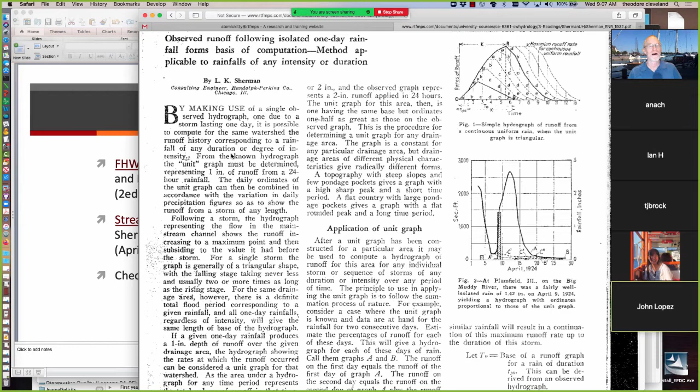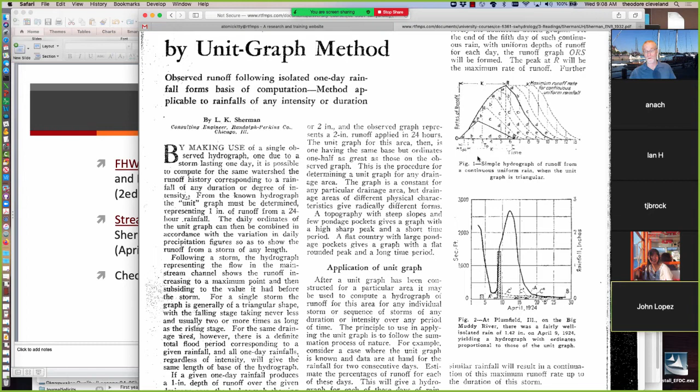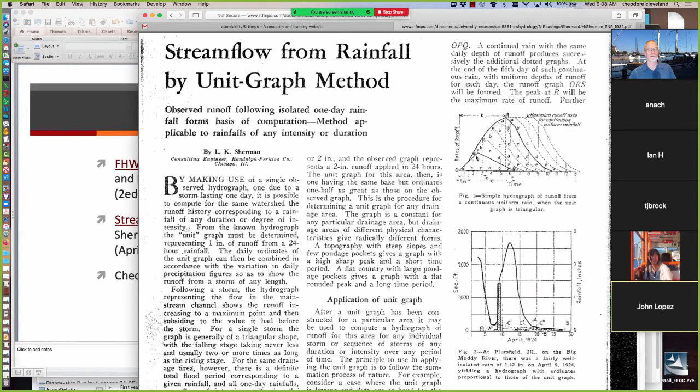So Sherman was a consulting engineer in Chicago, and the method that he demonstrated was largely graphical. Now that was a consequence of the computational tools at the time. Digital computers as we know them didn't exist yet in the 30s. There were analog computers and there were mechanical computers, but those actually required a very skilled machinist to just construct the computer. Think of it as actually writing the program, but you're writing the program by cutting pieces of metal to different lengths and hooking them up into gears.

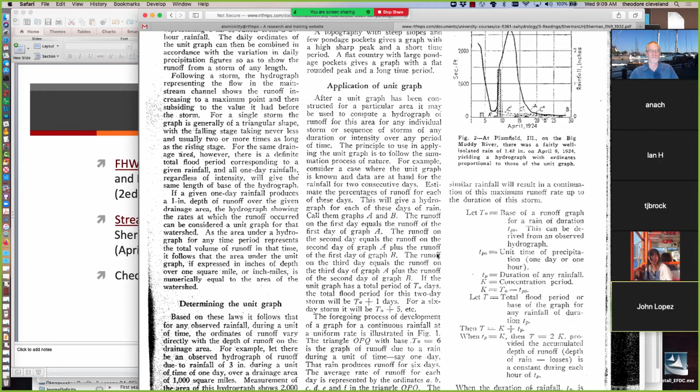If you ever get to visit Berlin, there's a museum of industrial technology, and they have on display a circa 1930s era mechanical computer. It still uses binary encoding, but it's easily the size of a small car and has computational capabilities rivaling that of your watch. I mean, in today's context, it's a fascinating thing. So you should all get to take a look at it. I have some photographs of it somewhere. I'll try to work it into a lesson someday just for some interesting sideline. And so you can read this on your own.

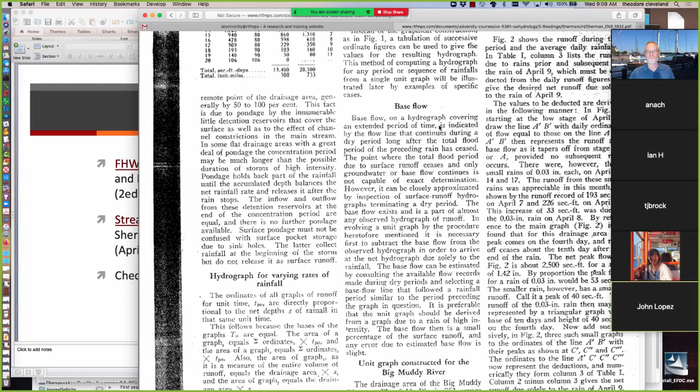Some of the key features of Sherman's paper is the idea of duration and concentration, or what later I call a characteristic time. And he's got some examples. He discusses baseflow, has one for a particular river, and shows the computed and observed hydrograph.

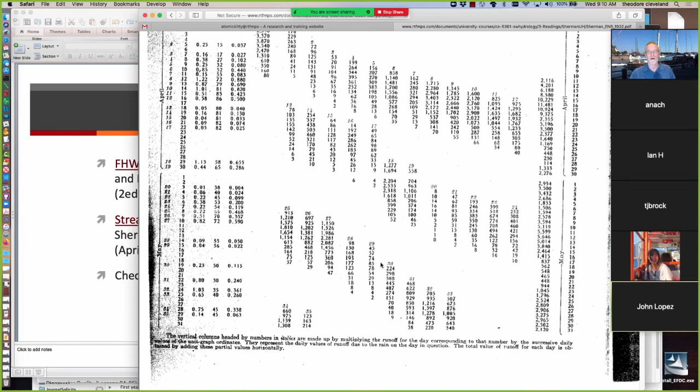Now in the 1930s, it's very unlikely they made continuous stage measurements. So this is still a cubic spline drawn through discrete points. But if you look at the plot, that's not too bad. Actually, we can't do much better today. And then here are the data that he used. And then here's another river that he studied, and actually get very good performance there.

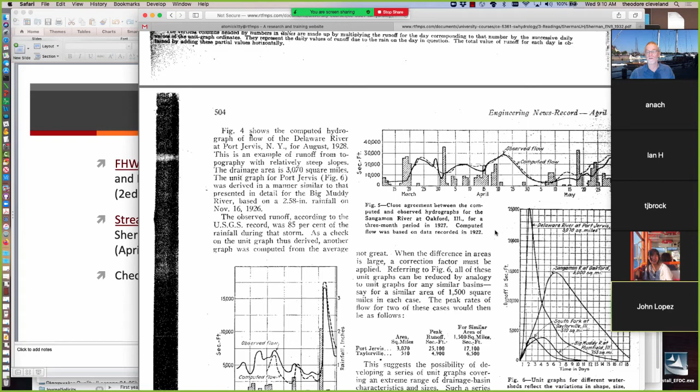And then there's a discussion on the different shapes of unit hydrographs that are proportional to topography, storage in different locations. This too was a very important concept because up until the paper, developing a response function for a particular river basin wasn't all that hard. And in fact, that clearly would have predated Sherman's paper. But making the observation that the physical characteristics of the watershed itself changed the shape of the response function.

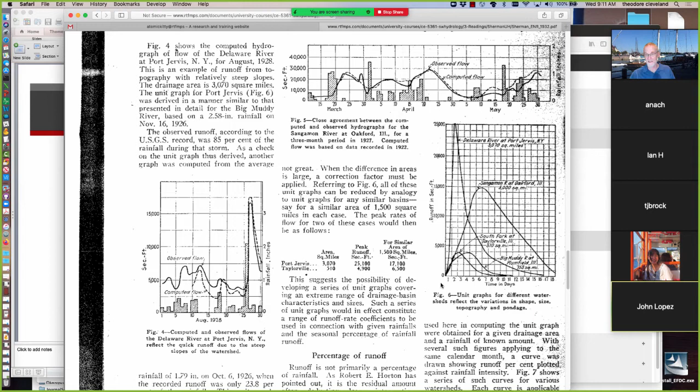And at the time, not in a predictable way, but there was clearly a message here that if we could correlate shape, size, topography, storage, and what other metrics we could find on the watershed, there was a chance that we could predict these response functions ahead of time and not necessarily have to have observations. And to this day, that's now done. Functions like these, if they are inferred entirely from watershed characteristics, are called synthetic hydrographs, meaning synthesized from things like watershed areas, slopes, what have you.

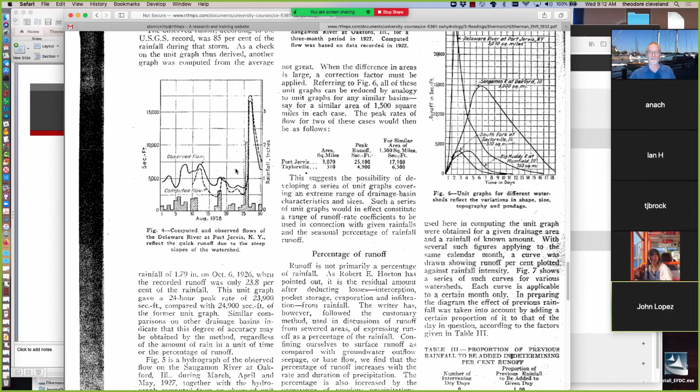Construction of responses based on observational results, a data science approach, that's called unit hydrograph analysis. So when you see the words analysis and synthesis, synthesis doesn't mean they're making it up out of the blue. Actually, they kind of are. But they're relating correlations of observed behavior to observed measures of a watershed. So this was actually a very important historical development in hydrology, certainly in engineering hydrology, but hydrology in general.

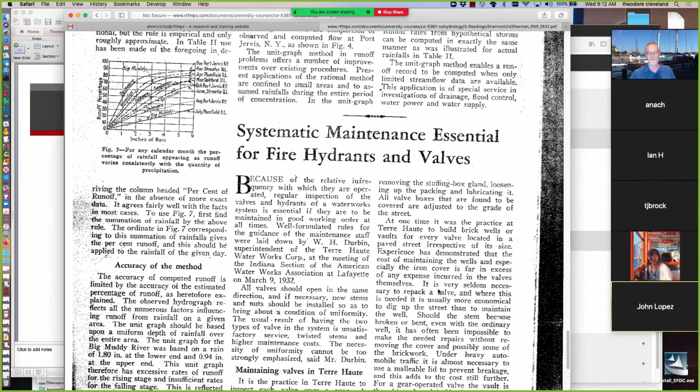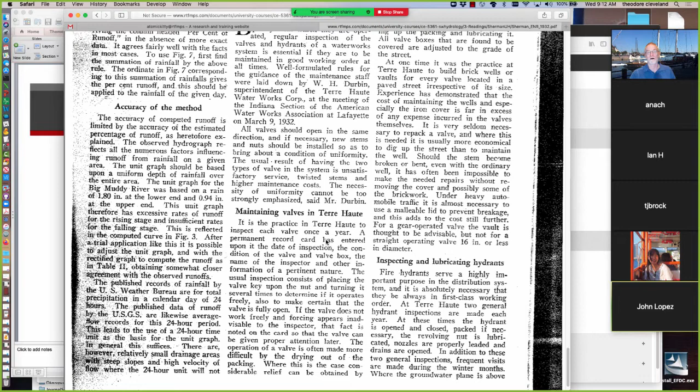And we get to the end of this paper, and so here's what I was pointing out, the difference in 1930s era articles and today. They just started the next paper on the same page. So that's not as common anymore. So Sherman's is a good read from a historical perspective. I don't think you'll find it terribly easy to read in the context of, I'm going to read this and apply the method to someplace else. It was a different writing style back then, and I would imagine you'd find that hard. I certainly would.

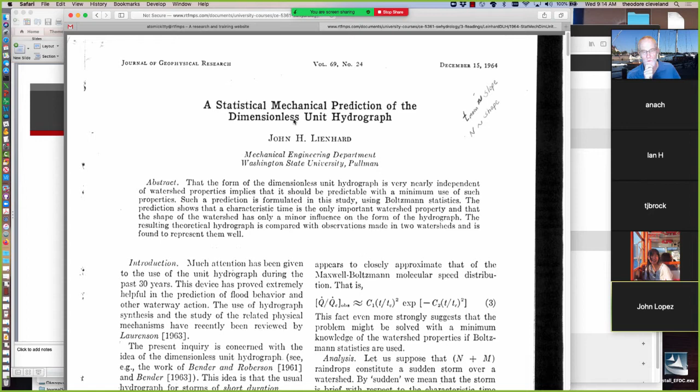Let me get the second paper that's an important historical read. It was a contribution by a mechanical engineer. Actually, his area of research was thermodynamics. And this paper is important because it establishes the idea that there is a valid thermodynamics or statistical mechanical explanation for the unit hydrograph, which in turn was promising in leading researchers to believe that we could correlate physical properties of a watershed to the hydrograph distribution. Now this was likely a difficult read because it's assumed that the audience has a reasonable understanding of Boltzmann statistics and statistical mechanics.

But going through it quickly, the discharge ratios, so Q dot sub C is a characteristic value. In our case, it's either a time characteristic, same thing here. It's also a magnitude characteristic, which would be our total storm depth, if you will.

And he's saying that the ratio in time to a peak characteristic value is some function. And further it goes on to postulate that function is going to approximate a Maxwell-Boltzmann distribution, which is shown here.

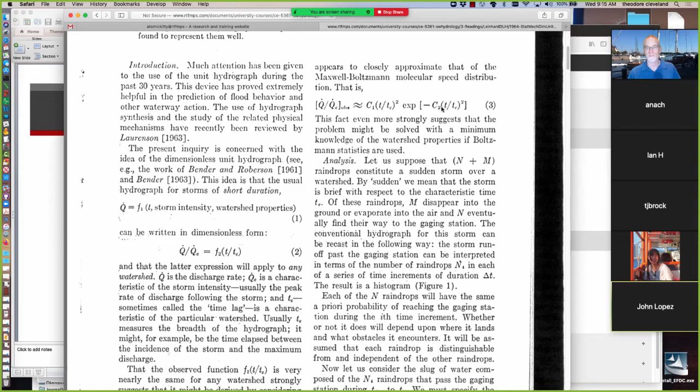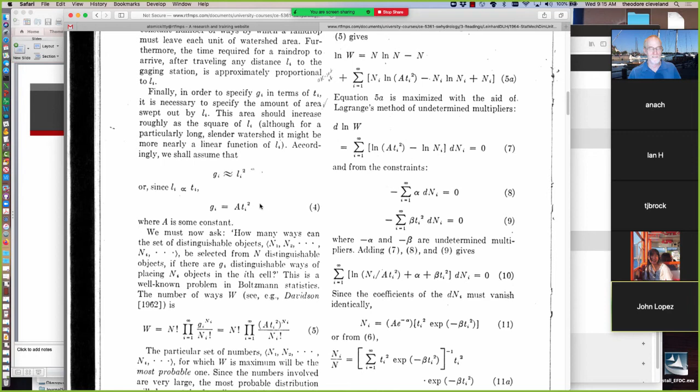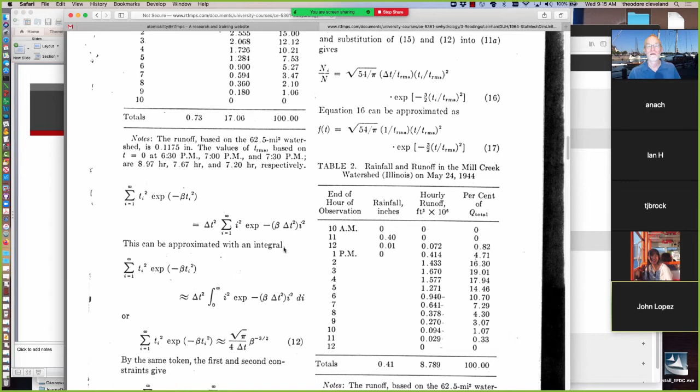And then from that, a series of statistical analysis, actually probability analysis, of what a Boltzmann distribution should look like leads to ultimately try to get to the end here. This is pretty close. A hydrograph distribution. And this paper doesn't tell you how to find these characteristic times, but it does demonstrate that if you have them,

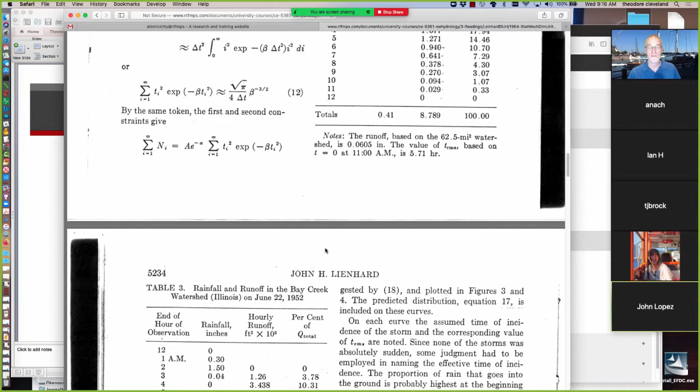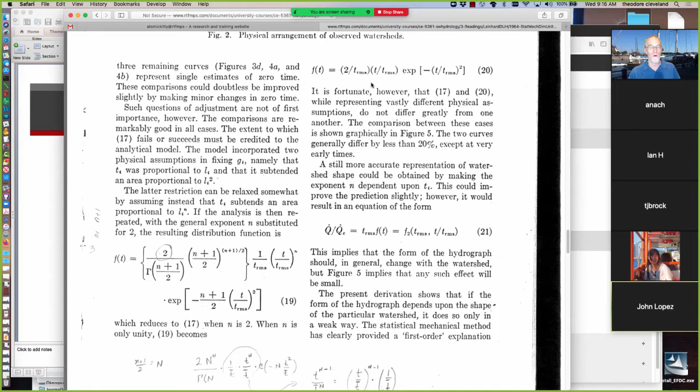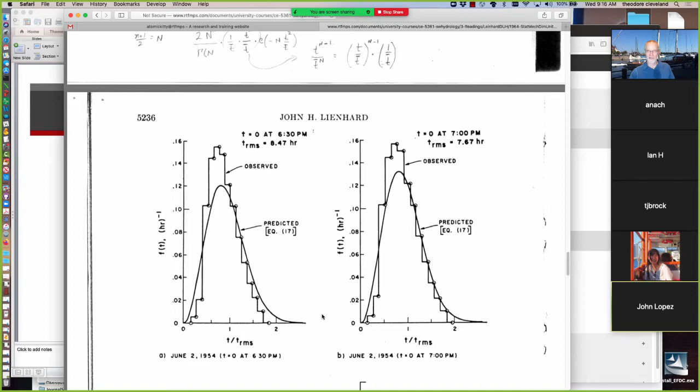there's the final hydrograph distribution, either in that form or this form, depending on the magnitude of an exponent. And you can see some stuff here that I wrote years ago, long time ago. But the results are shown here for a couple of watersheds, a couple of storms. And like Sherman's work, it's not bad.

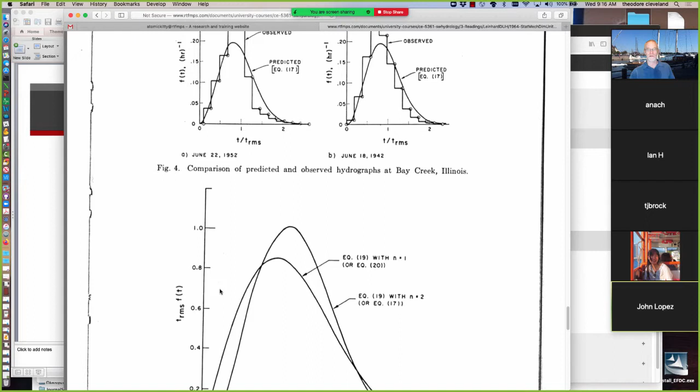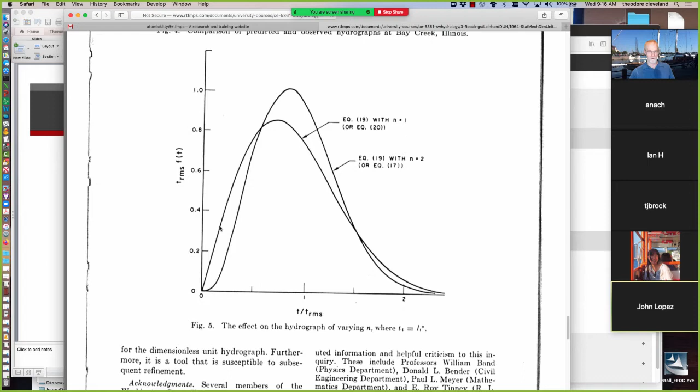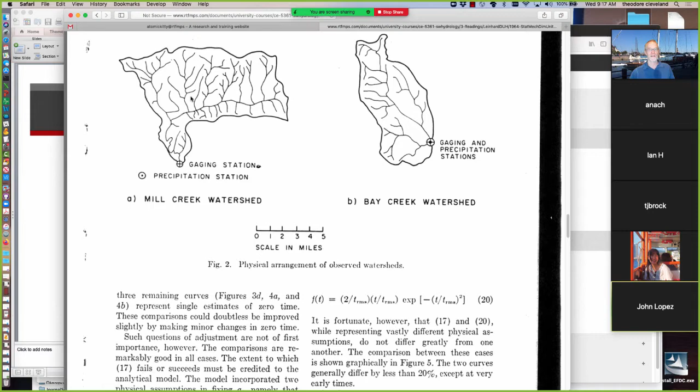And so these were the historical papers, and then the benefit of Lienhard's paper is by associating it with a statistical mechanical distribution, we're able to study the effects of different parameters of the distribution. And the key things here in his distribution is this exponent that he demonstrated would change depending on a fan-shaped watershed or a long, slender watershed.

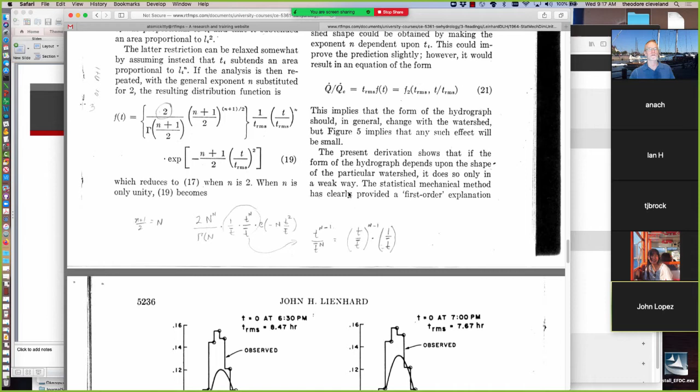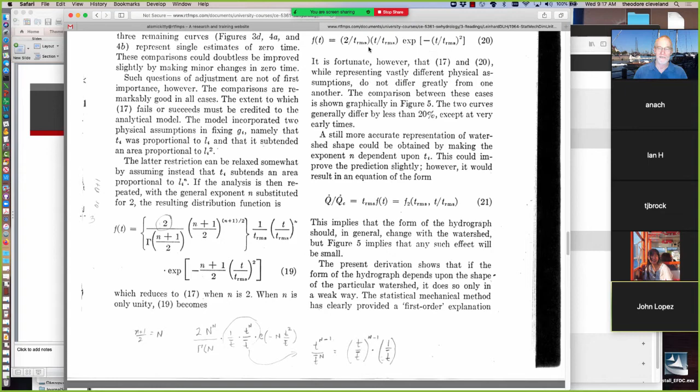And then there was subsequent work to try to quantify what that exponent should be under those different conditions. The other important feature was what characteristic time to use. So Lienhard used root mean square time, but one could just as well use an arithmetic mean time as the time characteristic. So that's some historical background.

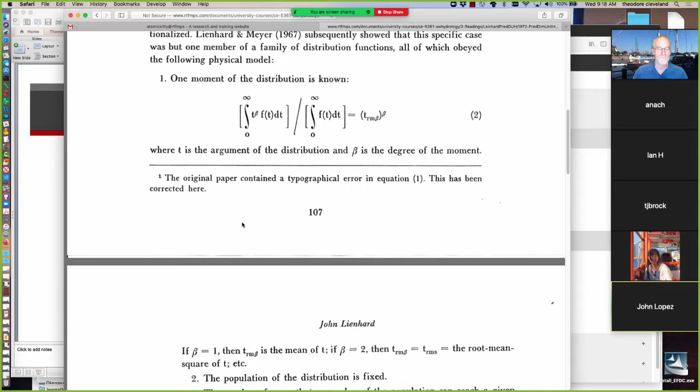And then in '72, Lienhard condensed the results. Hopefully this is the paper I want you all to have access to. Yes, okay. So here equations 3, 4, and 5 constitute what has become called the Lienhard hydrograph. And what's important is it turns out that they're a generalized gamma distribution, which is well documented and used in the literature. And here we see the effect of a fan-shaped watershed on the exponent here, and a long, slender watershed where the exponent becomes 1.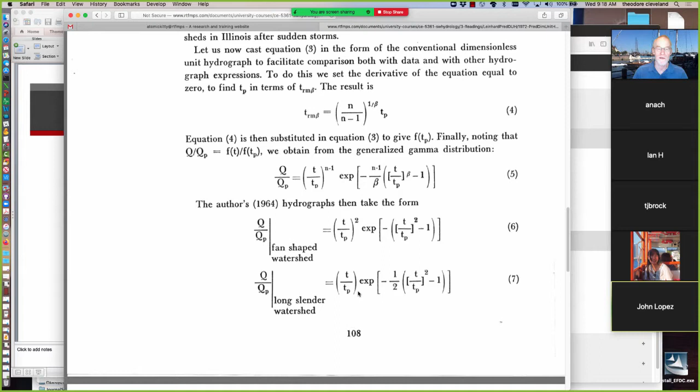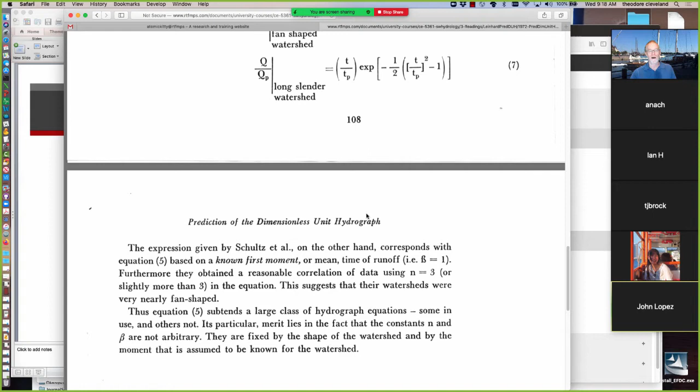And in some instances, the exponent goes greater than 2, although that's hard to come up with an understandable shape that causes that in the real world. So that's our theoretical background for the unit hydrograph. So it's not just a function of convenience. There is some meaning behind it.

So before we continue further, let's discuss the idealized hydrograph that you see probably in every hydrology textbook in the history of the world, and some that haven't even been written yet. So a hydrograph is a plot of paired time discharge values. And nowadays it may not be a plot, but it's a set of paired values. So there's a time and a discharge associated with that time, and we have a collection of those. Usually it's monotonically increasing in time, because otherwise it doesn't make any human sense.

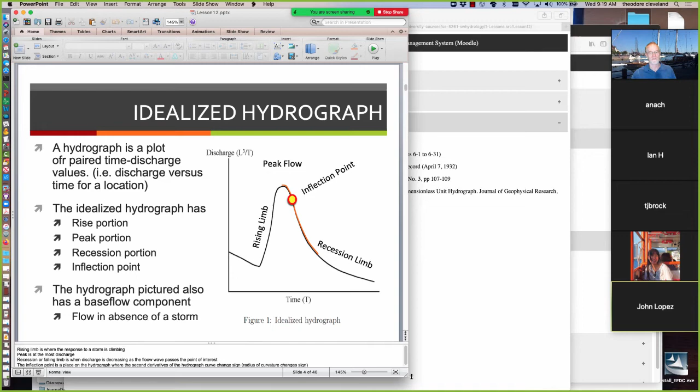And the idealized hydrograph depicted in here, go ahead and make it full screen, has a couple of portions. So there's this portion in time where the discharge is declining as time increases. So think of it at basin scales. The basin is slowly draining. That's water probably coming from groundwater. And then there's an input of water, a storm, if you will. And that input causes the hydrograph to start to rise.

So go ahead and put, so maybe there's some rain right there. And to make it meaningful, let's have some other rain right there. And I'm making no attempt to get the heights of the blocks to make any sense. But so we have this portion where there's some new input, and all of a sudden at the observation point, we see an increase in discharge.

And then it increases up, in the ideal case, to a peak flow point, and then it starts to come down, and the declining or the recession limb may or may not begin after the rain has ended, but most likely after the rainfall's ended it will start to recede, or at least if the rainfall rate has dropped considerably.

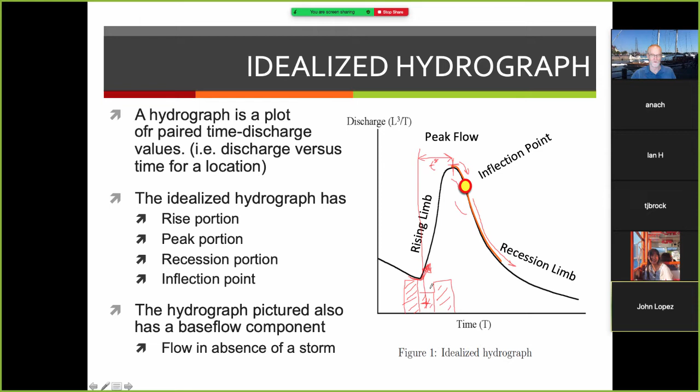So the idealized hydrograph has a rising portion, a peak, recession, and an inflection point. And in this particular hydrograph, it also has a base flow component because we're not starting at zero. We have some flow in the stream before the storm begins. So in many analyses, the first step is base flow separation. And there's quite a few different computational or operational approaches to making that separation.

The method displayed in this diagram is called the constant discharge method. And it takes its name from when the hydrograph begins to rise, we declare the discharge the moment it begins to rise as the base flow separation. And you can think of us as extending a line across this hydrograph. Everything on this side of the line is base flow. And everything above is storm flow. And so that's called the constant discharge method.

That method has some attractiveness for automated and semi-automated separation. And it is likely a relatively commonly employed method in practical application. A second method is called a constant slope method. And in this case, we're starting at the same beginning point, but instead we extend that line to the inflection point on the recession limb. And everything below it is base flow. Everything above,

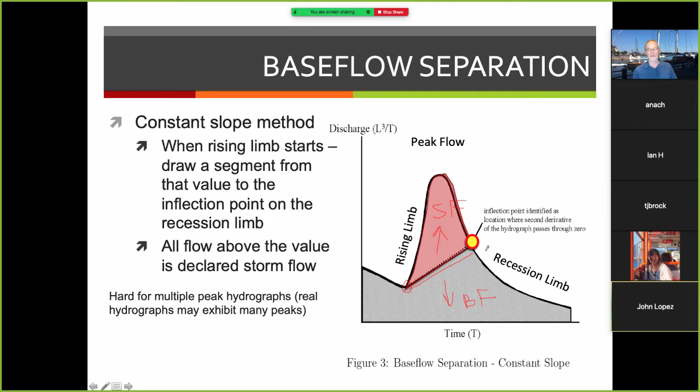A variation of it that's even more elaborate is called the concave method. And here again, starting from the same beginning point, when the flow begins to rise, we extend a tangent line to the pre-storm flow down to a point beneath the peak, and then another line segment from that point back up to the inflection point. And this shares the same difficulties as the prior method, in that with real storm data where there's a lot of variability or multiple peaks, this may be quite impossible to accomplish.

Nevertheless, this is used in idealized studies, and not all real data are as multi-peaked and ugly as I showed you all for Ash Creek. Every now and then, when we're doing a unit study and we're actually collecting data with the intention of understanding the hydrologic response of a particular gauging station, if you will, every now and then we get storm and discharge flows that are as clean as this diagram. And so those are immensely valuable from a scientific and engineering analysis perspective. But not always, and we can't predict when that's going to happen ahead of time.

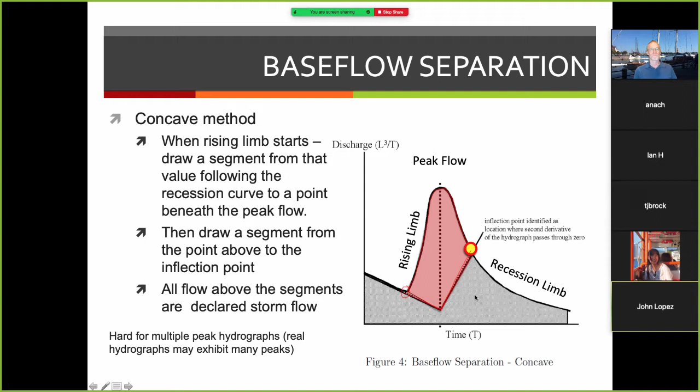So there's several more ways to accomplish base flow separation. Probably a more elaborate method that's in some of your older hydrology books is called the master depletion curve. And this is a basin scale approach. So this requires multiple years of data, and the analysts have to select particular storms from that multiple years of data. And they're lined up in a time agnostic order. And from that you can determine how the basin drains in the absence of storm flow.

And usually it's a decaying exponential, and there's a factor in the exponent. So usually it's like Q0 e to the minus kt, something like that. That constant k is what's sought from this analysis. And then from that point forward, from any known flow in the basin, especially if you know it's not storm flow, you can use that to determine what the base flow would be several months into the future, and then apply that to your storm hydrographs to do base flow separation. It's actually a far more elaborate problem than you could possibly imagine from anything in writing. Another approach is continuous simulation techniques, which I would qualify as being very much a master depletion curve method.

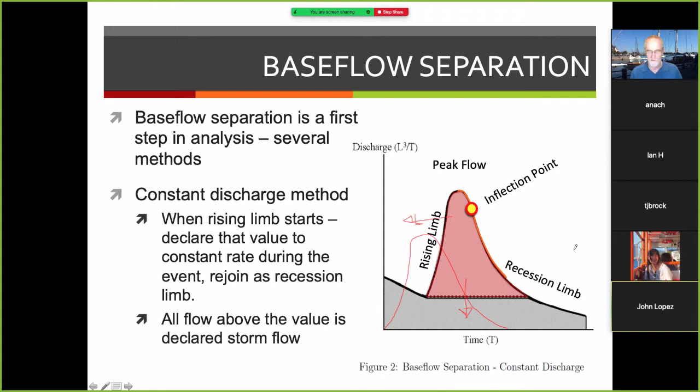So let's suppose we've done that. So now we have the rose-colored hydrograph as data, and we slide everything down on the discharge axis, so the zero discharge corresponds to this line, and we can jack everything on the time axis to the left. So you can think of our storm flow hydrograph as looking like this. It's supposed to be the same. So here's the storm flow hydrograph. So we've moved this way and moved it that way, and we've tossed away the base flow. So we're not neglecting base flow, we just don't use it in subsequent analysis. We'll reassemble the two time series later to produce a total runoff hydrograph.

So now we get to the topic of today. What is a unit hydrograph? How are they used? How are they made? And how do you synthesize them from simple watershed descriptions in the absence of gauge data? That's a long bullet item. We will attempt to answer these questions over the next several meetings. So we'll start, number one, with what is a unit hydrograph.

So a unit hydrograph is simply a function. Its purpose is to explain the time redistribution of excess precipitation on a watershed. Now I'm going to draw on this slide. Let's say we have a watershed right here, and there's the outlet. So we rain on it. Got to rain on the parade. We consider this raindrop. It doesn't have very far to go to the outlet. But this raindrop here has quite a bit longer distance to go. And so the unit hydrograph function is a tool to account for the different locations of arrival of rainfall. So that's what I mean by time redistribution.

We have this rain, imagine if you will, uniformly applied on the watershed. So it comes in, and some instant later, all of a sudden, there's water depth. Well, for that depth to leave the watershed, it's got to flow out the outlet. But this portion up here is going to take quite a while to get to the outlet, while the portion that's very close to the outlet can easily get out of the watershed. And so the unit hydrograph function is a function that accounts for those travel times, if you will.

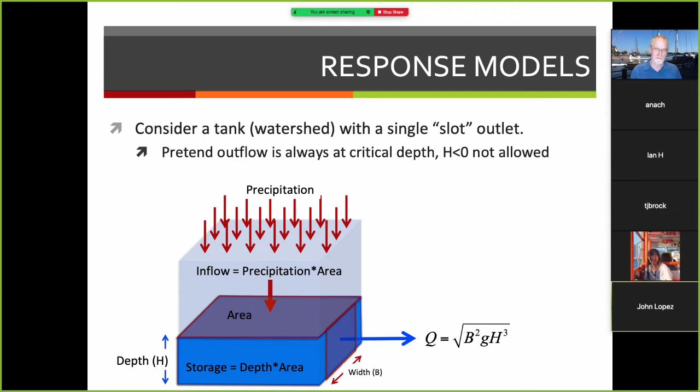And we collapse all those terms into this single discharge function Q. So here we have Q equals the square root of B squared g h cubed. So that is our response model for a very geometrically simplified watershed.

So now we'll make a couple of assumptions. First thing is, you can ignore the first assumption because we're using a slot, not a circular pipe. The outflow rate is determined by the depth of water in the tank at any instant. And back in your fluid mechanics class, you would have had a homework problem, or at least a lecture presentation of time to drain from a tank. It's a classic fluid mechanics problem.

It's probably done in every fluid mechanics class in the history of the world because it allows the instructor to introduce the concept of the continuity equation in the Reynolds transport theorem and the energy equation simultaneously. And then they use a modified Bernoulli's equation to explain the change in velocity from the free surface to the outlet. And you all have done something like that. You may not remember it, but you did it a long time ago.

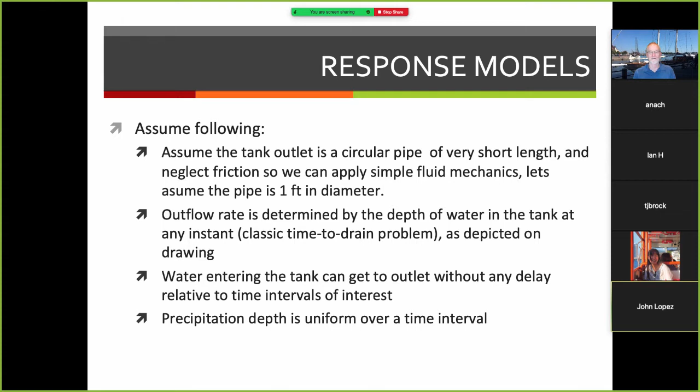So we're modifying the classic problem in the sense that we can add water to the tank through the rainfall. So water getting to the tank will initially pretend that it can get to the outlet without any delay relative to the time intervals of interest. And the precipitation depth is uniform over a time interval, also spatially. So if there's 1 inch of rainfall onto the tank, it occurs 1 inch everywhere. If we take those assumptions in our original drawing, we can come up with a very simplified updating scheme. So this is no longer hydrology, this is hydraulics.

We would set the initial depth equal to some value h sub 0, and the discharge at any time t plus delta t is equal to some discharge coefficient times the square root of all that stuff in the radical, B squared g times the quantity h of t plus delta t multiplied by the quantity P of t times A minus C sub d B squared g h cubed t over the area of the tank, quantity cubed. So all I've done is taken the original equation and made a fairly simple Euler method prediction scheme. So delta t's have to be kept pretty small.

The important thing of this isn't the equation itself, because if it were, this would be what we would have been using for the last several hundred years, but the ideas that are embedded in the equation. So here we see discharge is a function of whatever's in storage at the time. It's a function of some watershed properties, which are the area of the tank, and B is the slot width, the area of the outlet. And it's a function of the incoming precipitation. And once we have Q at t plus delta t, we can update the current storage and proceed forward.

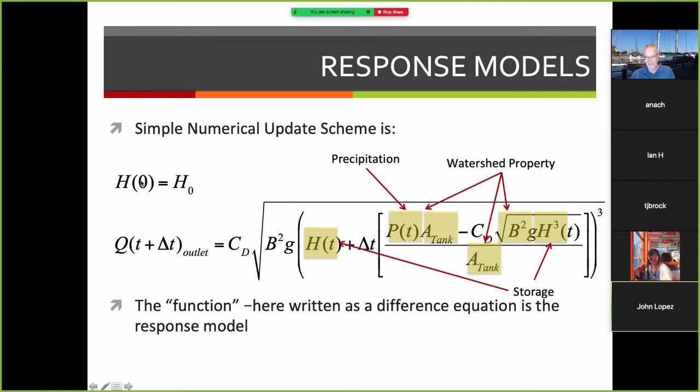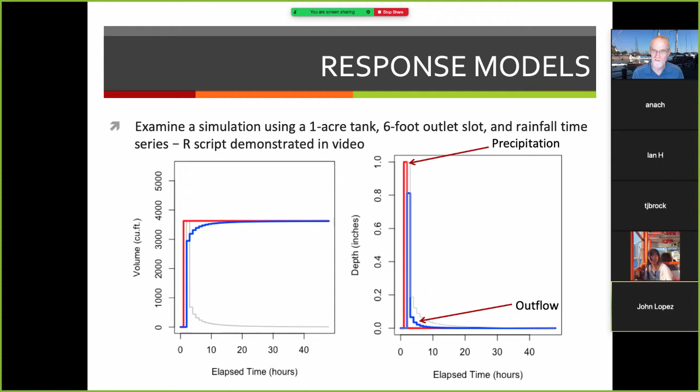And so we can put this into an R script and examine some interesting behavior. And so I have it in slides, but I'm going to attempt to use the actual R script.

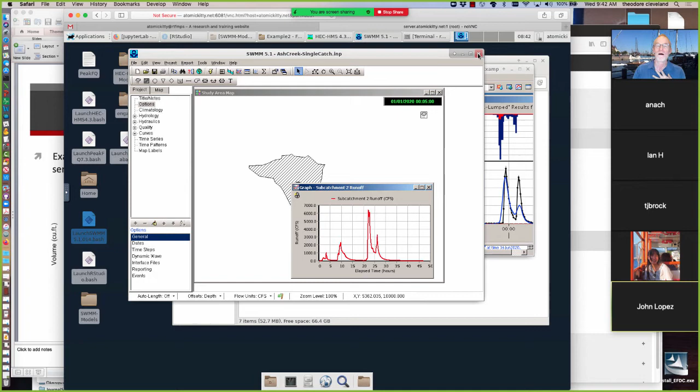Oh, it's still there from yesterday. Well, I hope I don't regret this. Well, actually, this is perfect, completely unintentional, but we'll take advantage of it.

Here's what I meant by inflection point: in these receding limbs it will be phenomenally difficult to locate. Plus, there's actually no base flow in these models anyway. But that's what I mean by the multiple peaks. So that idealized hydrograph was just that, the idealized hydrograph.

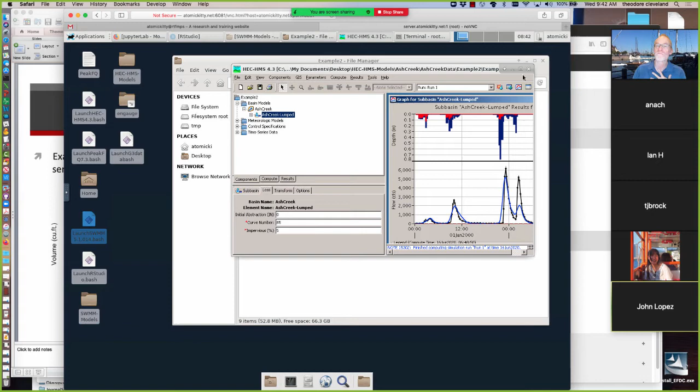Let me go ahead and terminate all this. Okay, so I want to get... okay, looks like I don't have R scripts built yet. No problem. Okay, I'm going to get a couple of R scripts that we have in the content server. They're already there, and I hope they work because I'm depending on that being the case.

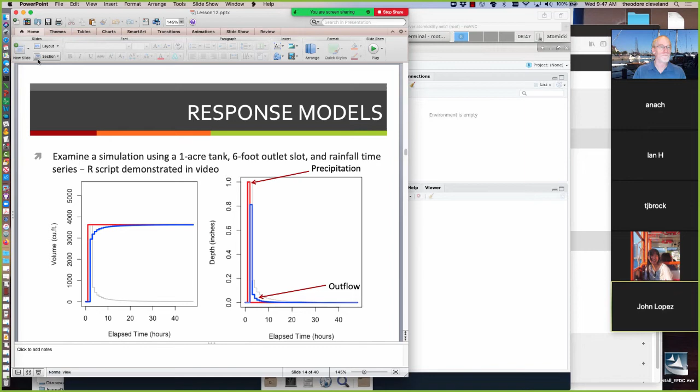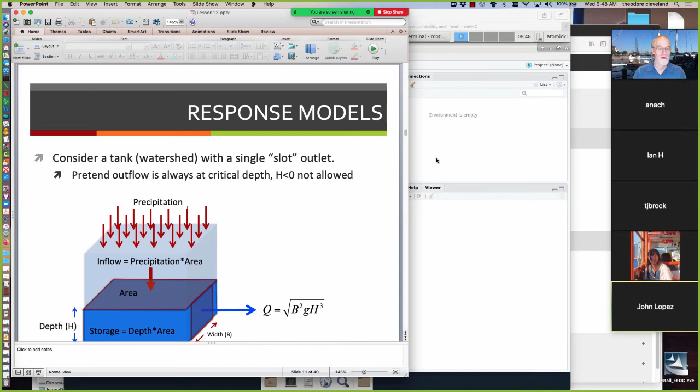And then the change in depth is inflow minus outflow equals change in storage divided by the area that gets the change in depth. So it takes precip, area as input, the output width, the output discharge coefficient, the current depth, the time step length, and gravity, and computes

a change in depth. So this basically is doing the change in storage with respect to time equals inflow minus outflow, and then it's multiplying by delta time, so it gets the change in storage equals delta time times inflow minus outflow, and then it divides by the watershed area to get the change in storage expressed as a depth. So we have the delta time, we have the inflow function minus the outflow function divided by the area or the scale of the process. So there's the three prototype functions.

And now we will go ahead and perform a finite difference in time step through the rainfall runoff process. And it's basically an Euler type method here. So this first part is a function for aggregating vectors. So that should be up in the prototype function. And now we'll go ahead and define physical sizes.

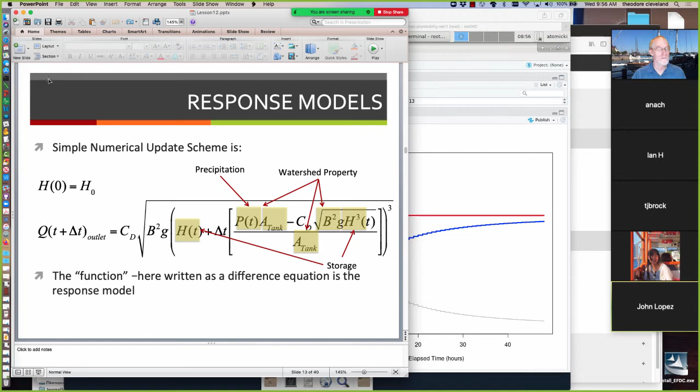Now let's change a watershed property. So we'll actually match the pictures over here. So 6-foot slot. So I believe the one in the presentation uses the number 6. Save it. So I'm going to rerun the simulation. The general characteristics will look sort of the same. The red line shouldn't change shape at all. But with a 6-foot slot, you expect the storage to decrease a lot faster, and so this blue line is going to be a lot steeper.

Ta-da, we're right. And so the only change we made was a single geometric change, and our response behavior has changed. Let's now try a different, and here in the presentation, the precipitation and outflow in the incremental space are plotted already. And I don't think I surely have that. That's time cumulative.

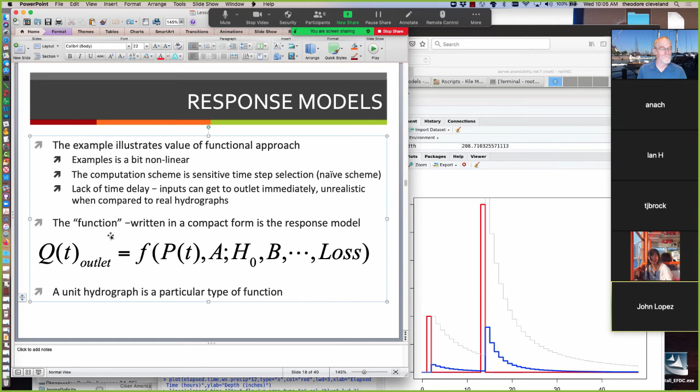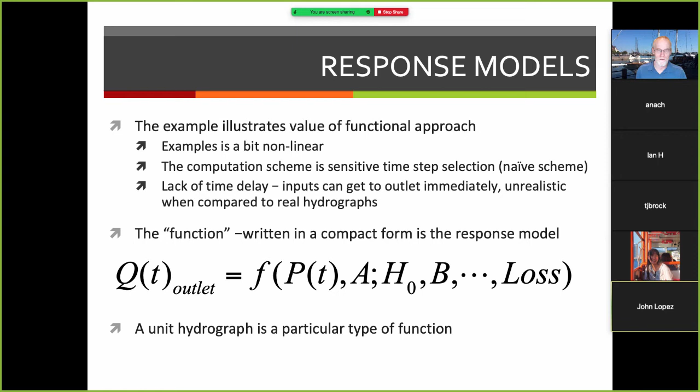So we'll return to the presentation, and if connected ponds like that over the years had proven to be a reliable model of hydrology, that's what we would be using. Turns out it's not, although there are ways to modify what I presented there, and that's pretty much how we would use SWMM as a hydrologic model. So we modify the hydraulics to be a little bit more correct, and we can use that in lieu of a hydrology model. But for the time being, we're going to look more at unit hydrographs.

Another way to picture it is with this diagram, is that the response models convert the excess precipitation signal into a direct runoff hydrograph at the point of interest. And this block model is actually very descriptive of how this is occurring in a computational environment. The precipitation signal comes in, the big red arrow. It's forced to be filtered through a loss model.

And so that green arrow that represents losses, those would be evapotranspiration losses, infiltration losses, water that's directed to storage that's not going to leave the watershed anytime too soon. And what's left is the excess precipitation. That's applied to a transformation model so that its temporal behavior matches what we observe as the runoff hydrograph, which is the blue arrow labeled runoff. That transformed box is the unit hydrograph.

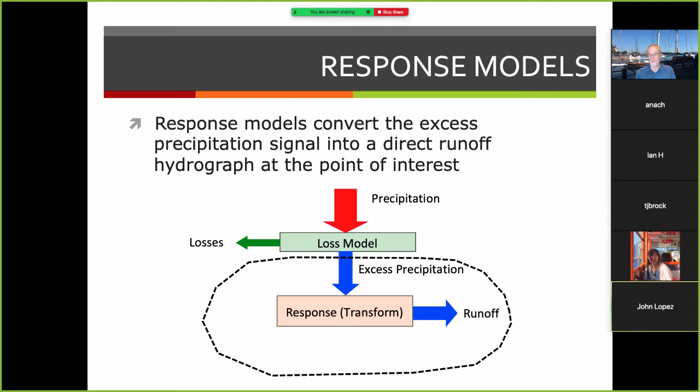So we're going to look at yet another picture. So here's our precipitation. So Puffy the cloud is producing our rainfall. It falls onto this watershed, which has an outlet. A certain portion of that excess rainfall has to be stored on the watershed as, think of it as average depth. Then there's a lost portion that's removed from the signal, and then that all starts to drain out the outlet. And because the outlet's smaller than the entire watershed, it can't all get out at once. And so there's a delay between the input and the output.

So here's our input signal of time width, capital D. Think of that as the duration of the rainfall impulse. There's the loss term applied to it, and that's whacked off the top. And so what's left is this purple excess. What we see at the runoff or at the outlet is at time zero, nothing. At the end of the duration block, there's now a little bit of runoff, and that's the first portion of the precipitation signal after loss has been accounted for. That's accumulated and is starting to run out of our watershed.

And then we see over the next time block another portion, a little bit larger. Next time block here, another portion, and another portion. So in this diagram, the impulse duration is capital D, but the runoff time duration is 1, 2, 3, 4, 5 of those. And that runoff duration time will change from watershed to watershed. It's generally invariant within a particular watershed. In fact, it has to be for unit hydrograph theory as normally presented.

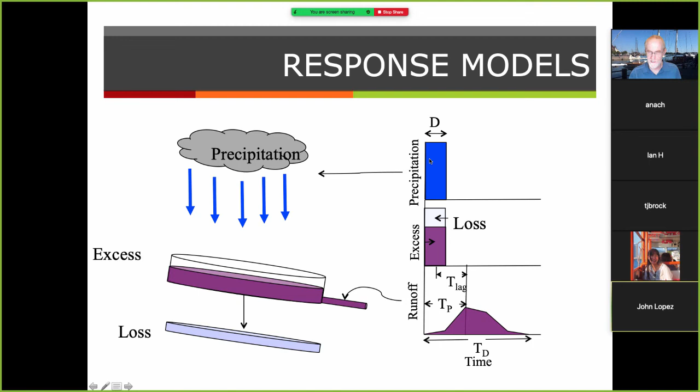And the unit hydrograph approach, or the function, is typically broken into 3 components. First, there's the loss part that we've already examined. There's an initial abstraction and then an ongoing loss. It produces an excess rainfall signal. That excess rainfall signal is what can become the direct runoff.

So there's a mathematical process called convolution between this red area and this green area. That produces a direct runoff hydrograph, which is the responses to each of these impulses added together in time. And that's put back on top of the base flow to produce the total runoff hydrograph.

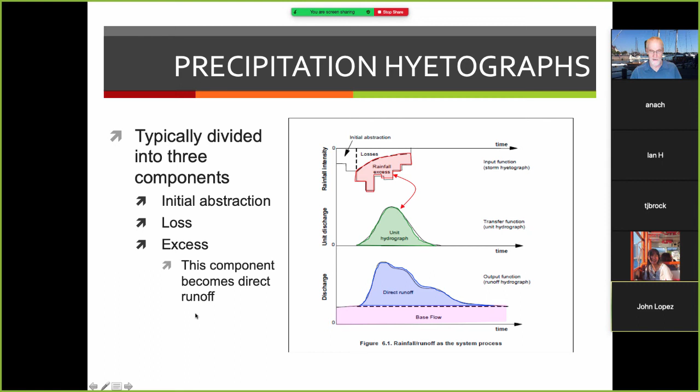So a little bit of background on the different parts. If the pulses immediately went to the outlet, we would expect the direct hydrograph to have an identical shape as the input rainfall distribution. So on the left of this figure, the intensity impulses, the loss model's been applied, and then they're all pushed down to the intensity equals 0 axis on the lower diagram. And if there was no delay, then the intensity input would produce a runoff diagram that looks identical to it, only in this case it's changing color from red to green.

But in fact, even if the pulses are uniform over the entire area, those that are close to the outlet will arrive sooner than those that are far away from the outlet. Thus, there's time redistribution. And that's represented by this transparent green hydrograph in the back. So if there was no time redistribution, red would make green, but because there is, everything's actually shoved a little bit to the right on the time axis.

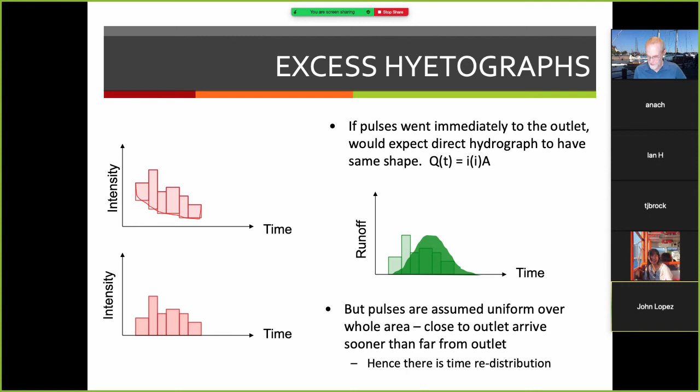And this next picture shows that here. So now the transparent green pulses have been redistributed in time to produce the solid green blob, which is the direct runoff hydrograph for whatever watershed this is. And the unit hydrograph is the function that performs that mapping.

Some other assumptions of unit hydrographs: the direct runoff duration, that D, is the same for all uniform intensity storms of the same duration. Two excess hyetographs of the same duration will produce direct runoff hydrographs of the same duration, but with runoff rates proportional to the volumes of the excess hyetographs. We kind of demonstrated that in that R script, where the storms that were 1 unit high and 3 units high almost produced a tripling of the response. Because the example is nonlinear, that was not the case. But in the unit hydrograph approach, we stipulate that it is the case, and it reduces the set of available functions we have to worry about.

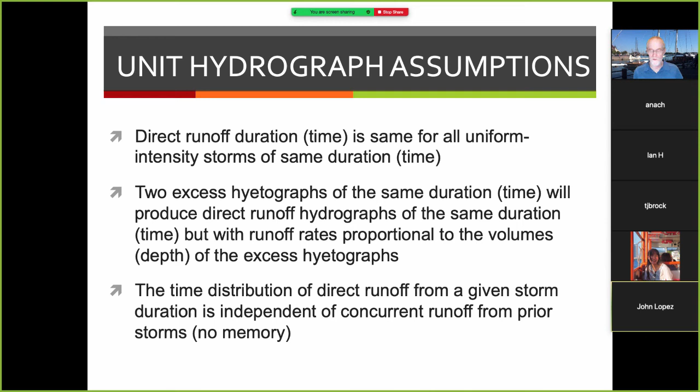And this leads to a signal processing concept called no memory. It means that the watershed has no memory of its prior condition. That's probably wrong in a strict scientific sense, but it's proved to be a useful stipulation for explaining the behavior of watersheds. So here we're going to try to look at those three statements pictorially. The direct runoff duration is the same for all storms of the same duration. So all storms that have length of this red line produce a runoff response of green line length, regardless of how tall they are.

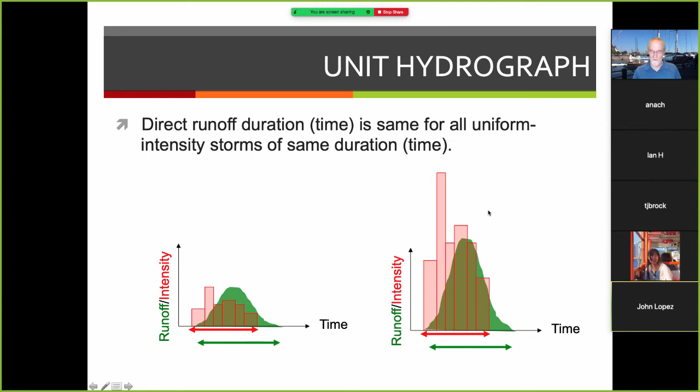Two excess hyetographs of the same duration will produce direct runoff hydrographs of the same duration, but with rates proportional to the volumes of the excess hyetograph. So what that means is that this set of hydrographs is this high, produces a response that's that tall. If we double everything, then the height of the green blob doubles, but the time base does not change.

And in terms of calculus, the integral of the excess precipitation signal in time is equal to the integral of the discharge signal in time. And then 1 over A, where A is the watershed area, is what scales between the two. So precipitation in inches, watershed runoff in watershed inches, and in cubic feet per second. If we divide out by the area, we can get it into watershed inches. The time distribution of direct runoff from a given storm is independent of concurrent runoff from prior storms.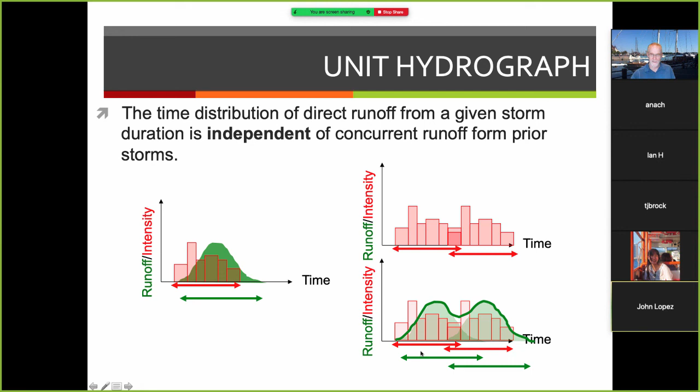The presence of this first response doesn't affect the behavior of the second response. So the second response doesn't magically get narrower or taller just because of the existence of the first response. They do add together in the runoff axis once they've been lined up correctly in time.

Each unit hydrograph has a duration associated with it, which was capital D in the diagram. And if we're doing it using discrete techniques, that duration has to coincide with the time step size. If we do it using some other techniques, that requirement is relaxed somewhat. But it's best to keep that in mind.

So a D-hour unit hydrograph is a response to a D-hour pulse of excess precipitation. And the flow associated with that response is reported every D hours until there's no further response, what I call T sub D in the diagram.

Each watershed has a characteristic response time, the lag time or the time to peak. And the characteristic response time is thought to be related to physical characteristics of the watershed, contributing area, slope, and so on. That second bullet item is huge. That's what allows us to synthesize watershed behavior without having observations.

Let's see, the time step for aggregation must be the same as the duration, and the time to peak for the watershed must be an integer multiple of that duration. That requirement's only true when we're doing discrete calculations. There's computational ways around that. And that computational step is called convolution. And there's two types.

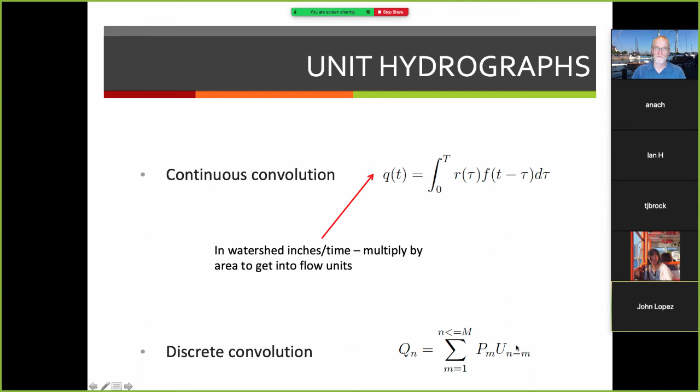And so what we will do, the convolution integral will make more sense when you see this, when I explain this example. So what we will do next time is we'll pick up from here and we'll work through this example slowly enough to explain the different parts.

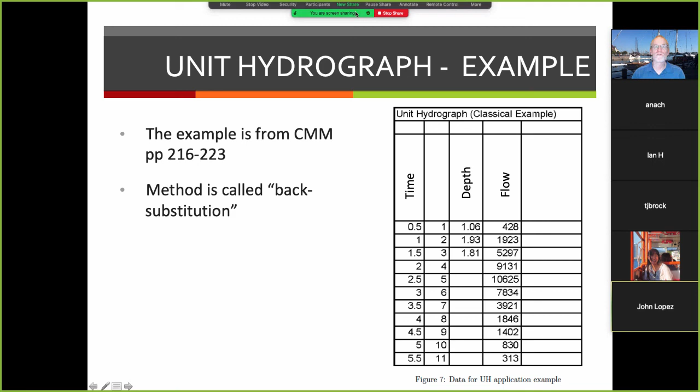So I am going to exit this screen, escape, go away. That worked out pretty good today, which doesn't always happen.